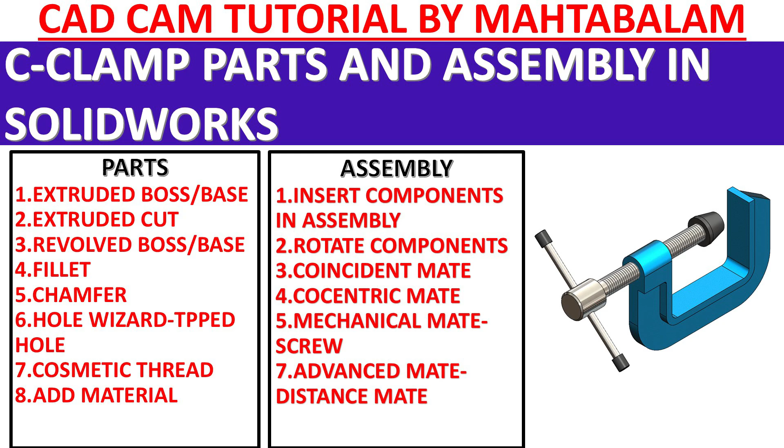In this tutorial, we will create each and every part separately and assemble at the end, and we will set some important relations also. So I hope you like it.

So let's do a simple exercise in SolidWorks. Let's make a new exercise in SolidWorks. This is C clamp assembly in SolidWorks. We will create each and every part and assemble. Note, all dimensions are in millimeter.

ANSI metric standard for thread. There are 5 number of parts. Material written cast iron, plain carbon, rubber, plain carbon. The quantity also mentioned here.

Now which one is part number 1? You will see this is the assembly. This is part 1, the clamp. Scale already written 1 is to 1.2 for reference.

Okay, now let's check this one. Now we will see this one. You will see side view. The depth is 20 millimeter.

Then there are two portions: one, this center one, 8 millimeter; the outer one, this one, 20 millimeter. Just note down this thickness, 5 millimeter, 5 millimeter, center to center distance 60 millimeter, 70 millimeter this one, 30, 68. Okay, then this inside radius seems 5 millimeter.

Fine, and you will see this all. So let's try this first. Now I am going to select the right plane, sketch. Now activate here line tool.

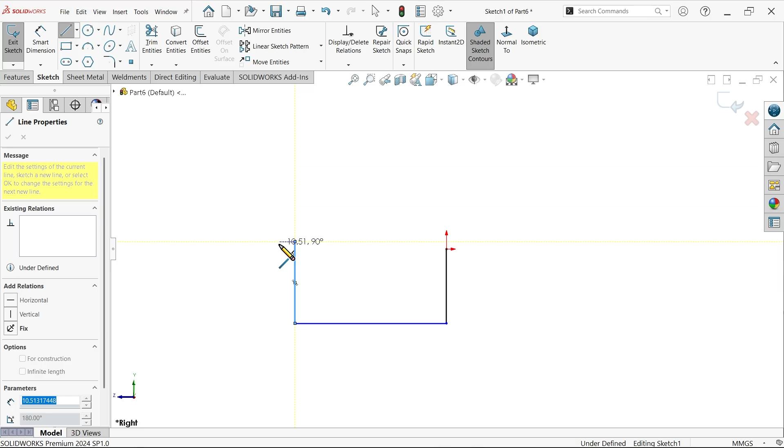Now let's make a few important relations. These two points, keep like this.

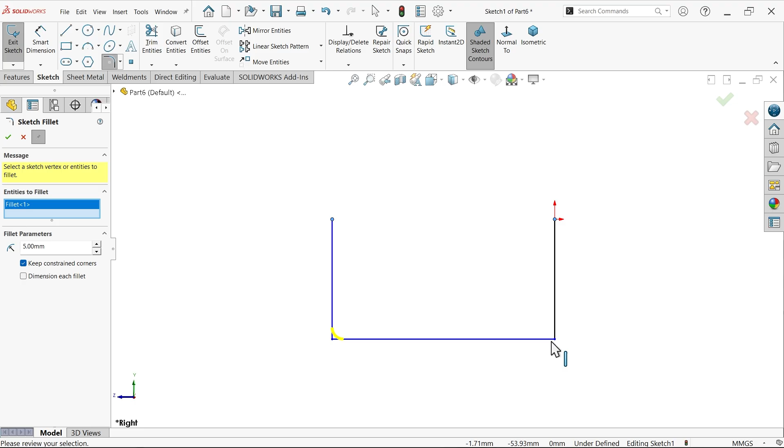Activate here sketch fillet, keep 5 millimeter, and select both the corners because this corner is given 5 millimeter.

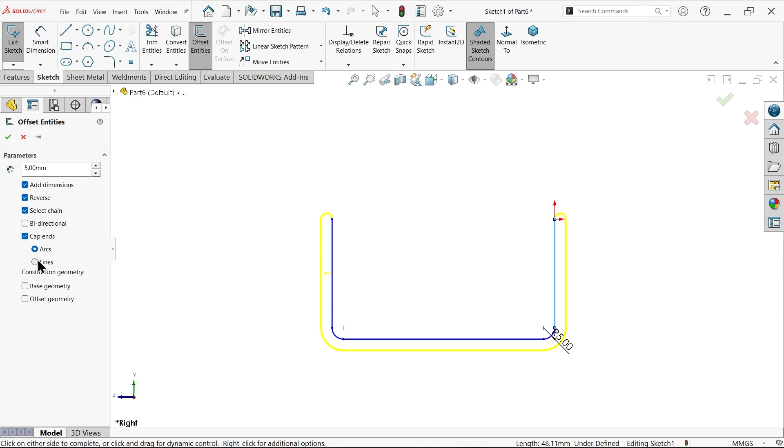Let's activate offset, keep 5 millimeter, add dimensions, select chain. Now let's select chain. Now make it reverse. Or even though you can select end cap line. That's it. Now you will see we have a closed profile.

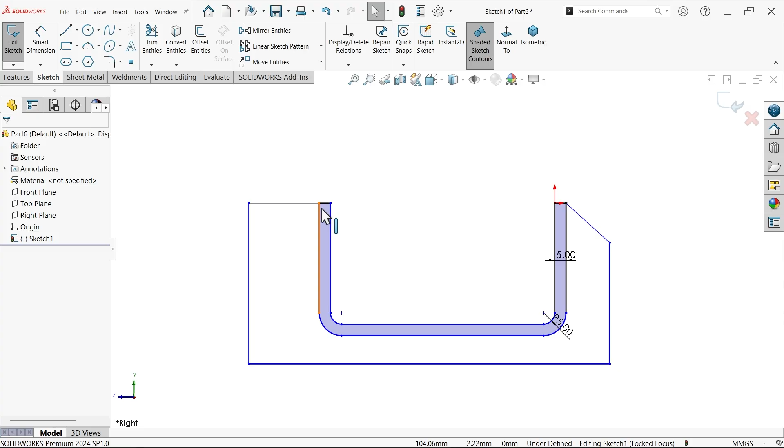Now again let's activate line tool. Now this is our second profile and this is also going to be closed. So let's apply dimensions.

120. Now center to center, 70 millimeter. Now distance from here to this part, 3, and from here to bottom, 68 millimeter. Okay, fine.

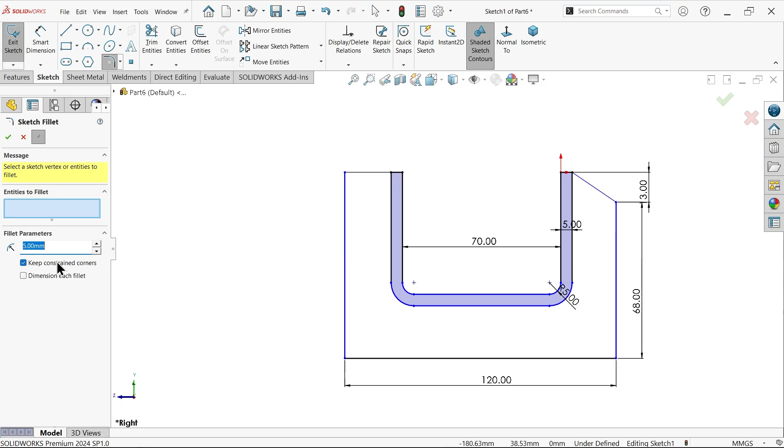Let's apply here sketch fillet and this is going to be 30 millimeter, these two corners. Fine, close. Okay.

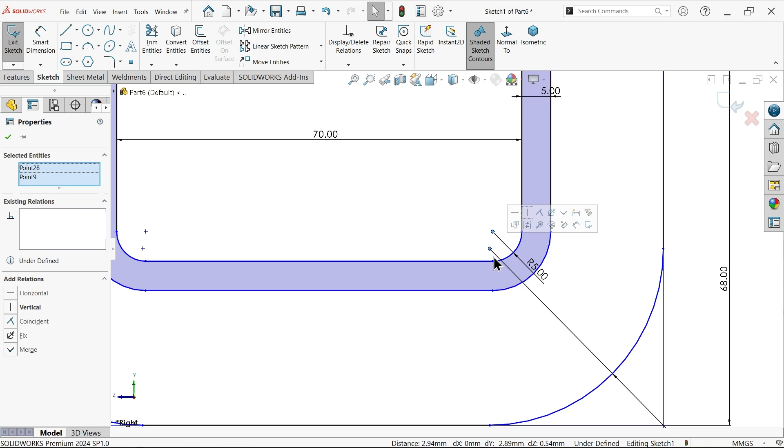Okay, do one thing, look: according to drawing, these points are same in one. So make it coincide. Look, the drawing seems fully defined.

Now simply select extruded boss base. Select this part first, keep mid plane, and let's make this one depth only 8 millimeter.

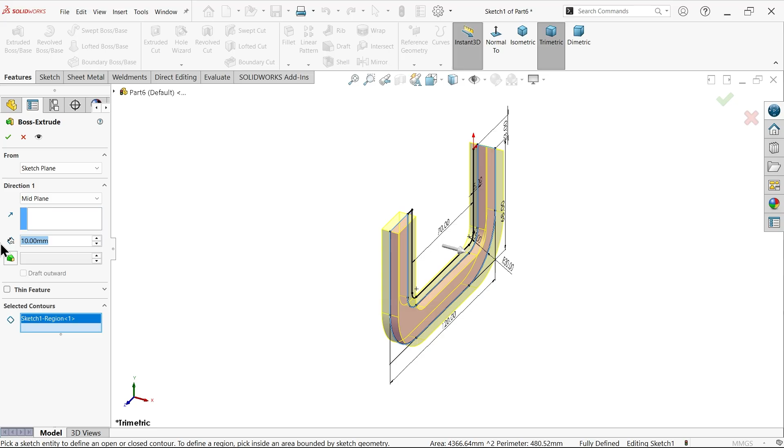Okay, now again select the sketch, extruded boss base. This time in selected contour choose this face and make it 20, mid plane. Say okay.

Now at this part you will see R10 and 23. This is a kind of a hole, M12 into 1.5. This corner fillet here given 2 millimeter. Now this distance 23.

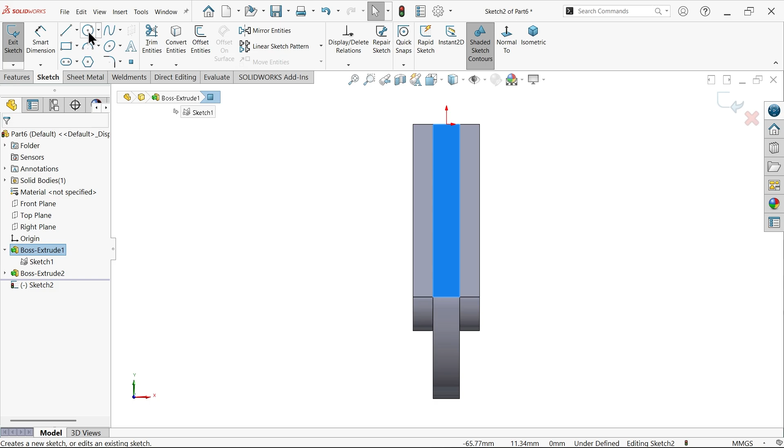Okay, let's do this. Select this face, sketch. Now activate here. Let's make a circle up to this point. Activate line. Okay, let's do one important relation.

Select these two lines, outer line and circle tangent. Similarly, do one thing, tangent. It seems fully defined.

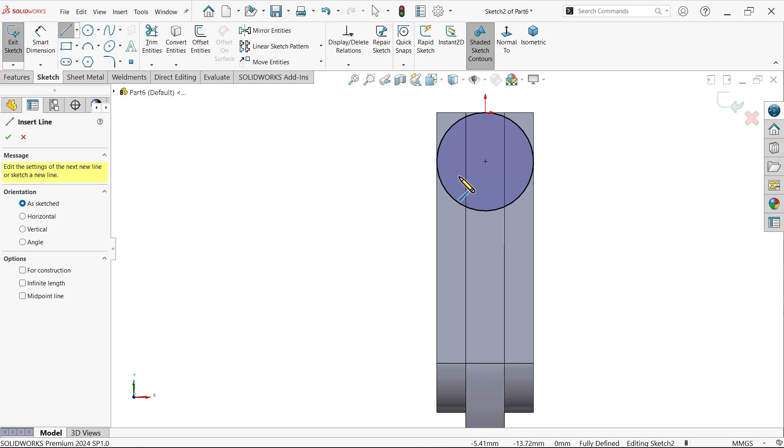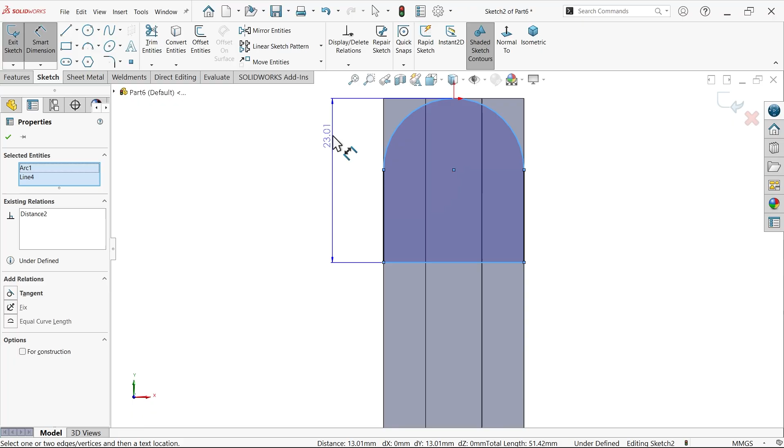Exit. Now let me select trim entities, power trim, and delete this internal one. Smart dimension. Now select this line, press or hold shift key, select this top edge and make distance 23. Extrude, and this I am going to, let's say, up to surface and select this surface. Fine.

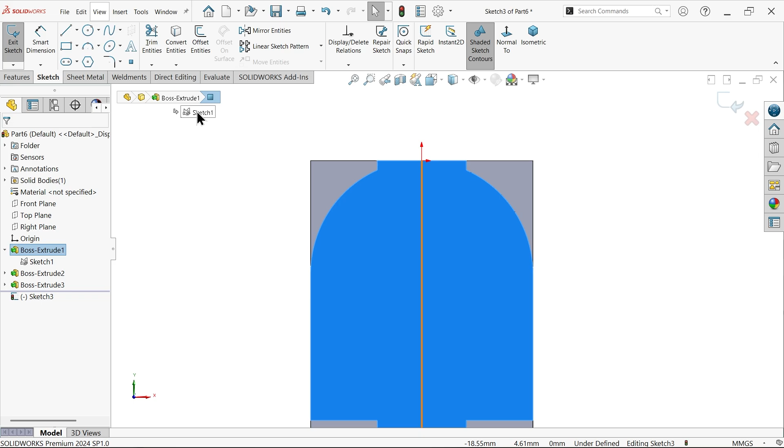Again I am going to select this face, sketch. Now I want to cut this upper face, so let's activate line tool first. Now start with this point. You will see this is the tangent point.

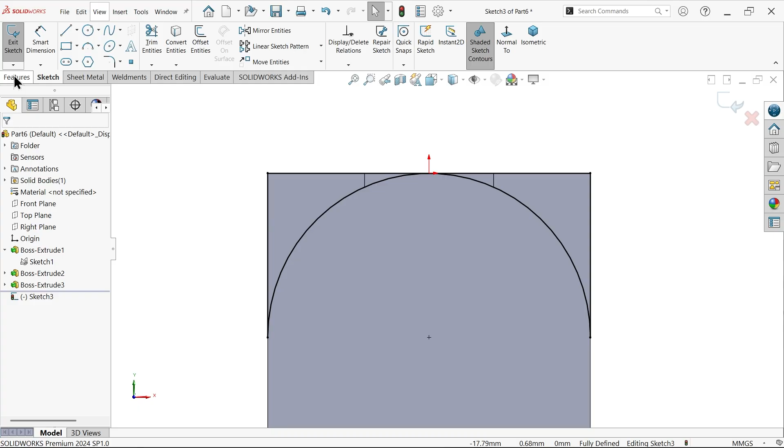Okay, 3-point arc. Make sure this line connects with this. Extruded cut. Now select this portion, this portion. Okay, now here choose up to surface and select this surface. So this is going to cut only up to this surface.

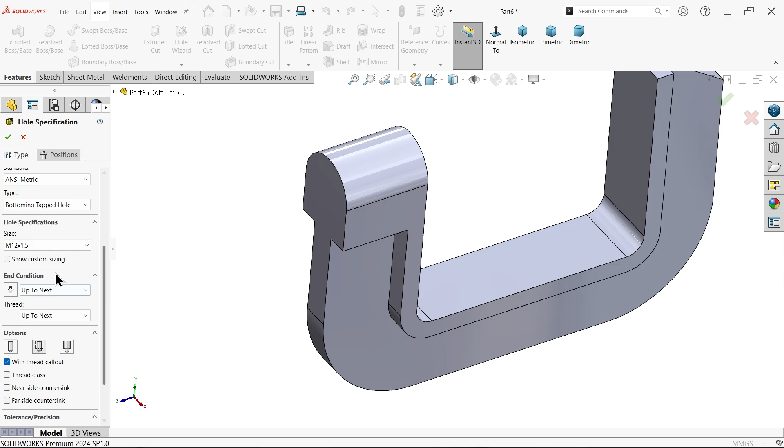Say okay, look here. Now let's make a hole here. Hole wizard: go to, let's say, straight tap, ANSI metric, bottoming hole, M12 into 1.5, up to next.

Thread with callout, check position, and first we have to select this face. Now just keep cursor over edge and you will see center point. Place, right click, choose, select. Okay, now go to option, document properties, detailing, and here check shaded cosmetic thread.

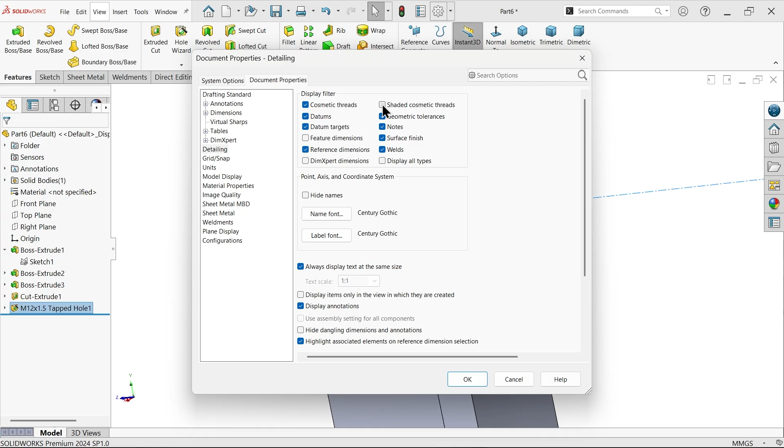See, radius 2 mm. These are the geometrical dimensions, we don't need for this. Now let me activate fillet.

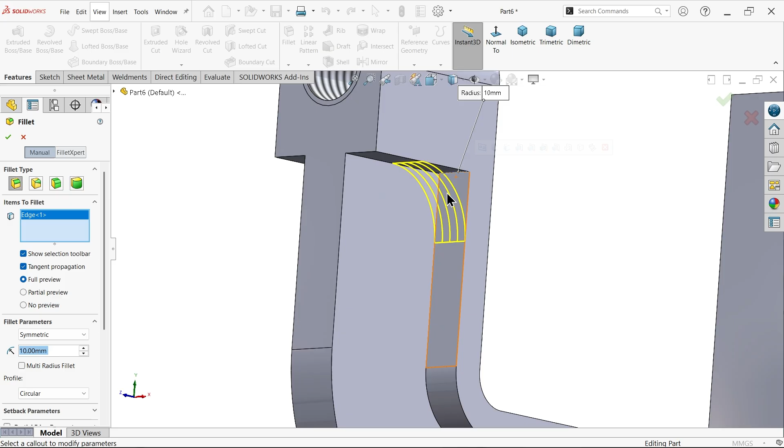Select this edge and here make 2 mm, and fillet type constant size fillet, tangent propagation, and profile circular. Okay, see.

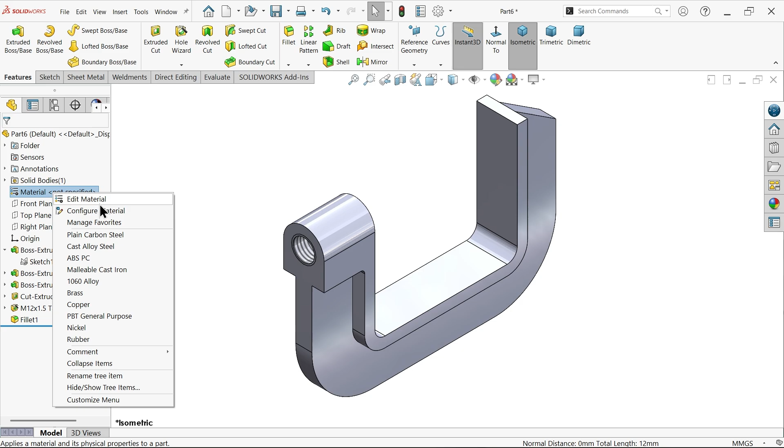Now let me add some material. Go to edit material. This is iron, gray cast iron. Apply, close. I am going to little edit the color.

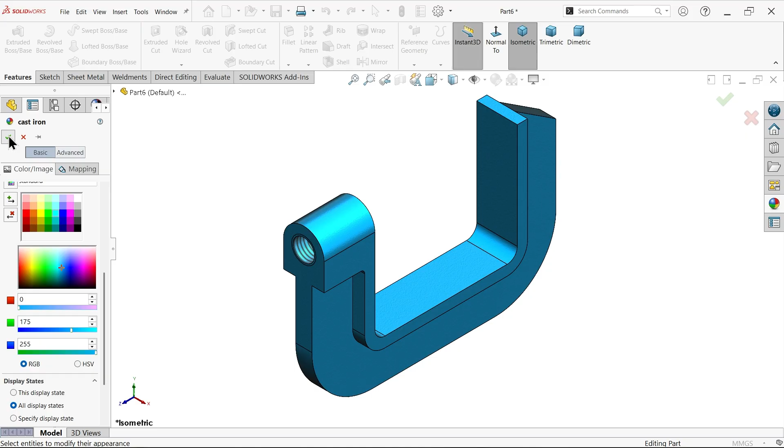175. Fine, now select this internal face and change this finish. Let's say polished steel.

Now let me save this one. Desktop, create a folder. C clamp assembly.

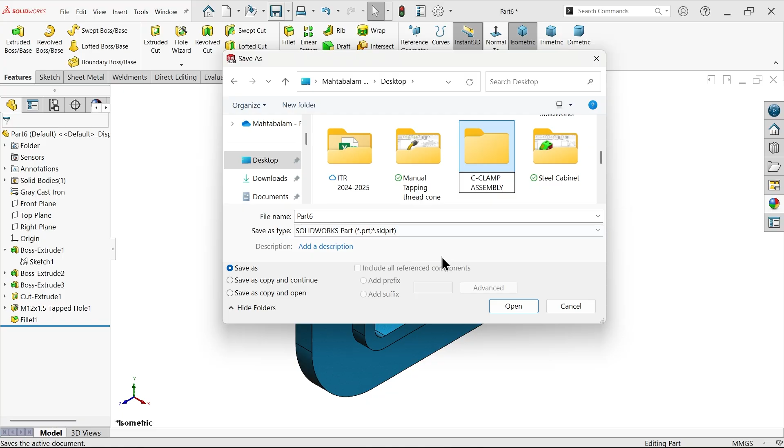Make this one part 1, clamp. Now let's go and choose new part 2.

Now part 2 is the screw. See this outer diameter 20, length 22, then from here to here 96, then this diameter you will see M12 into 1.5. Okay, then this one 6 diameter, 12. So first make this one, then there is a hole also.

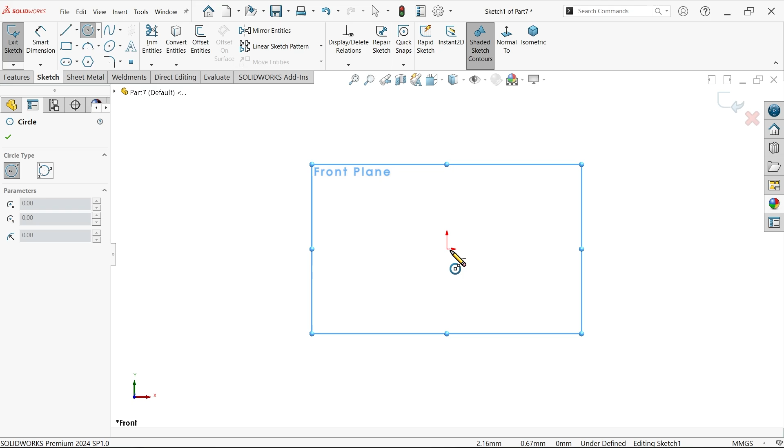Let's do this first. Front plane sketch. Now activate circle. Start with origin point and define dimension 20 mm. Go to feature and activate extruded boss base feature. Here choose end condition blind, 22 millimeter. Make it reverse. This is our front face. Say OK.

Now let's apply material for this, so we will use plain carbon steel. Apply, close.

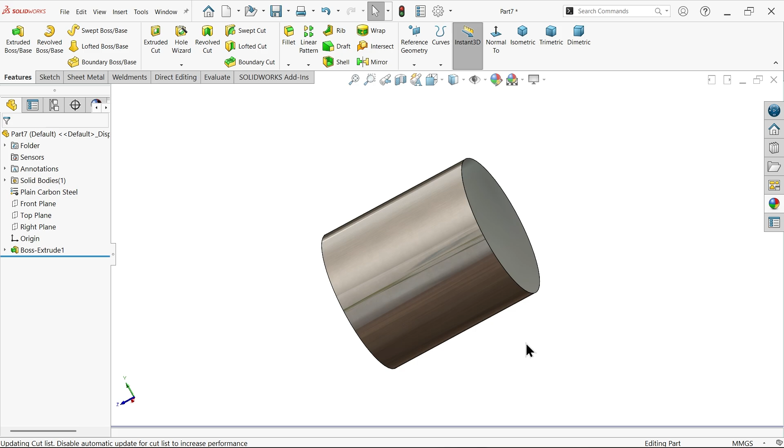Now select the back face, sketch. For M20 thread we are going to create M12, not M20, 12 diameter, and extrude this. Select extruded boss base feature, and we need to extrude up to 96 millimeter. So here keep end condition blind because this is moving in the perfect direction.

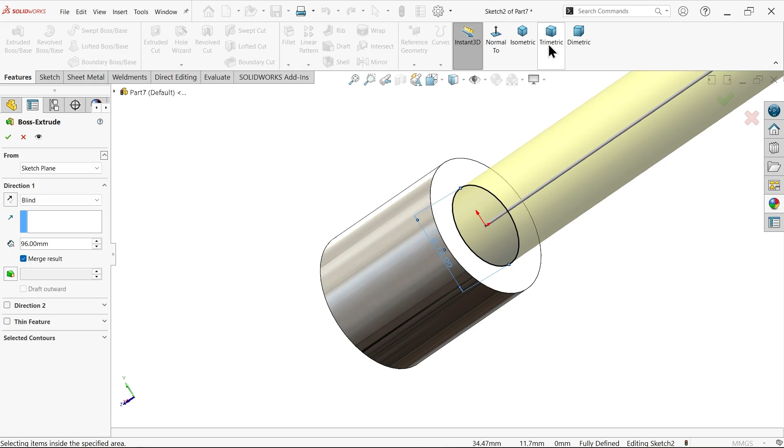Okay, select this face, sketch. Now here one more, diameter 6. Extruded boss base. Now this length going to be, let's say 12 millimeter.

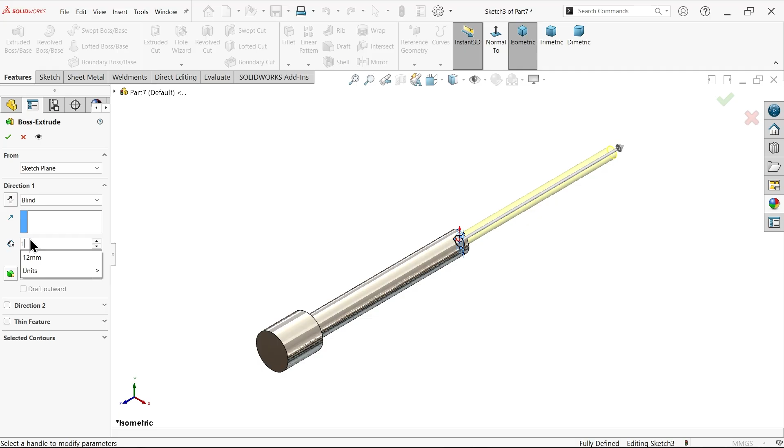Say OK. Let's apply cosmetic thread since we already did cosmetic thread before. So I'm going to insert, drop down, annotation, cosmetic thread. Now here I'm going to select this edge, metric, machine thread, M12 into 1.5. Here keep blind, and the length of thread 90 millimeter. Show.

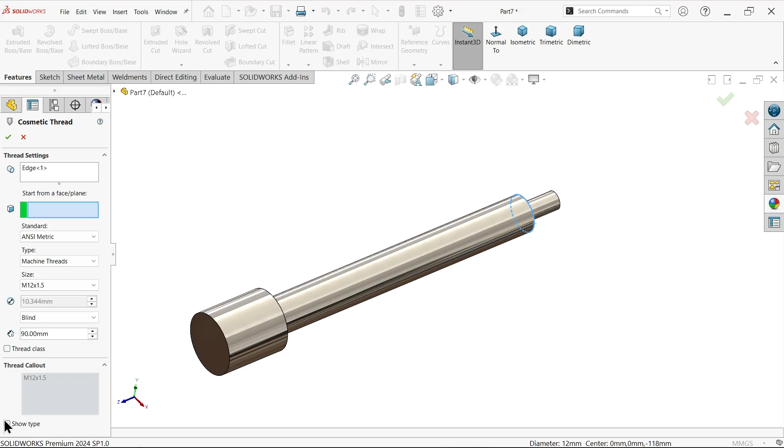Now start face, select this face. Okay, go to options, document properties, detailing, and here check shaded cosmetic thread. Okay, now look.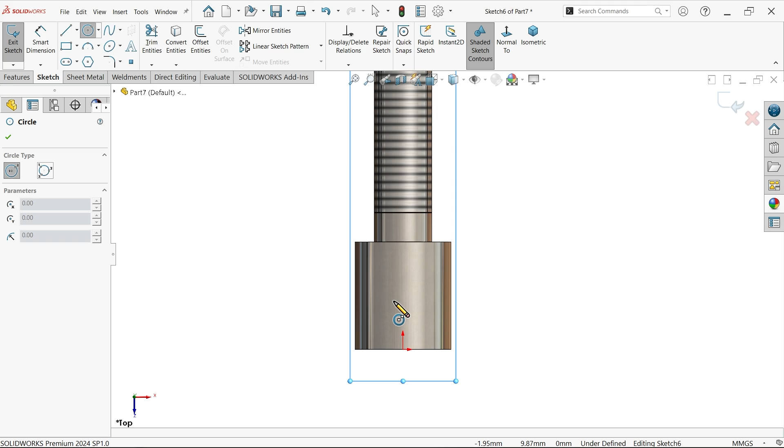Top plane, sketch, circle, smart dimension. Now this is going to be 12 millimeter. 5.5 is still not defined, meaning we need to define a constraint. So select center point and origin point and make constraint vertical.

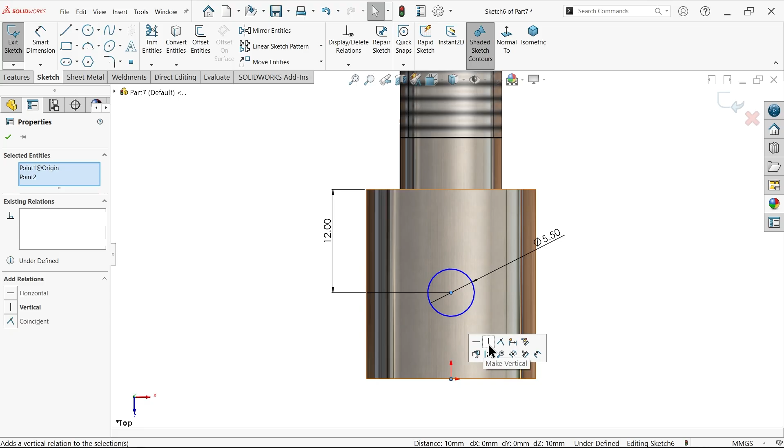Extruded cut and make a hole here. So here I am going to select through all in both directions. So see, this is going to cut through all in both directions.

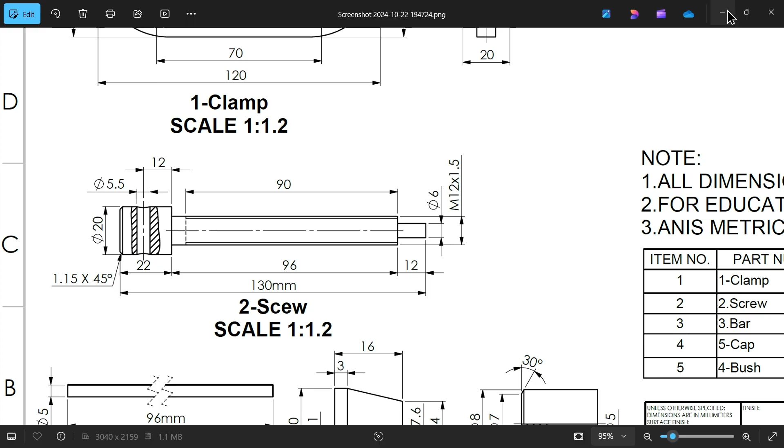Now chamfer 1.15, 45 degree. That's it, total length 130, we will measure it later. Chamfer, angle distance 1.15, and this is going to be 45 degree. And select this face. Say OK.

Here we are done. Save. This is part number 2, screw.

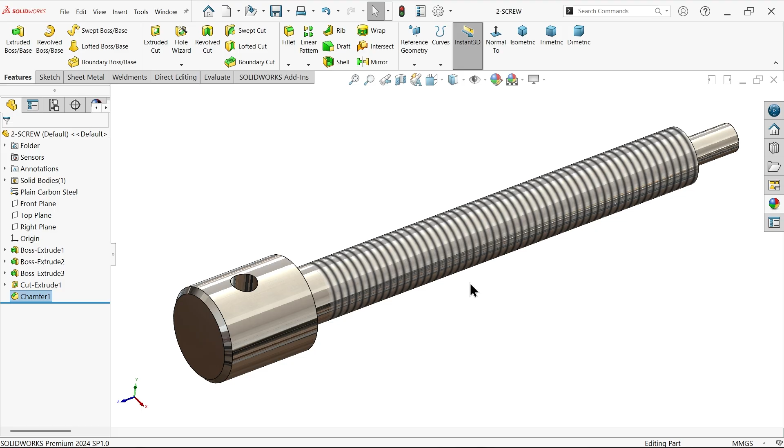Let's go save a new part. Part 3 is just a bar, 96 by 5 millimeter.

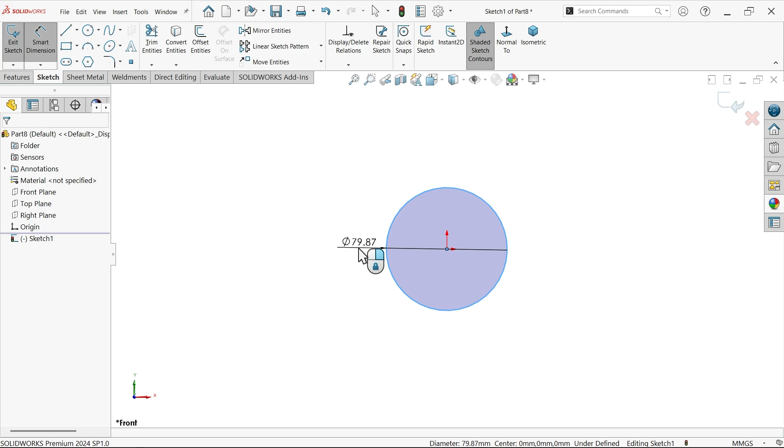Front plane, sketch, activate circle and draw a circle with origin point. Smart dimension, define diameter 5, say yes. And go to feature and activate extruded boss base. Now here end condition I am going to keep mid plane so that material moves to both sides equally.

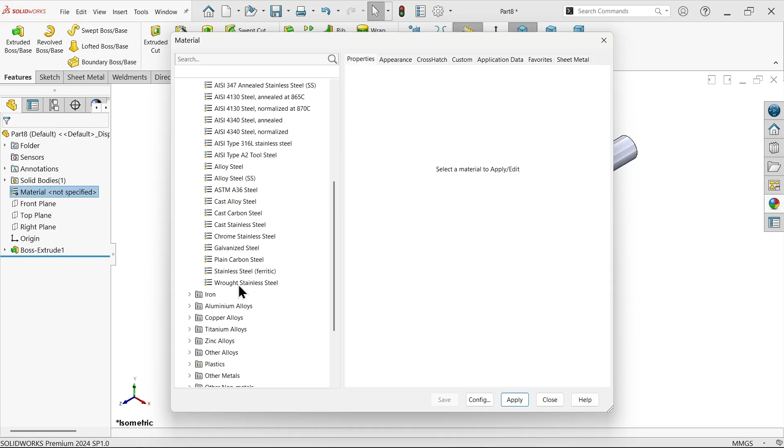See, 96 millimeter. Material, close. Plain carbon steel, close. Now let's say this is going to be the bar.

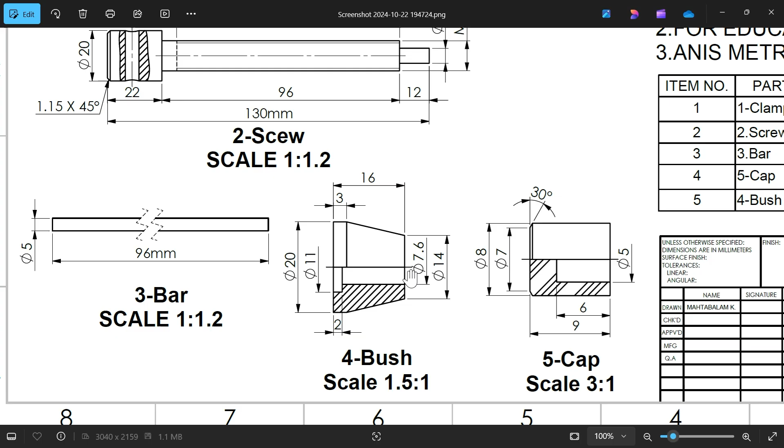New part. Now part number 4 is bush. This is half section view. See, this outer diameter 14, 20, and you will see this is the section view shown 7.6, and this is going to be 11, and depth you will see 3, 16, and this cut depth 2 millimeter.

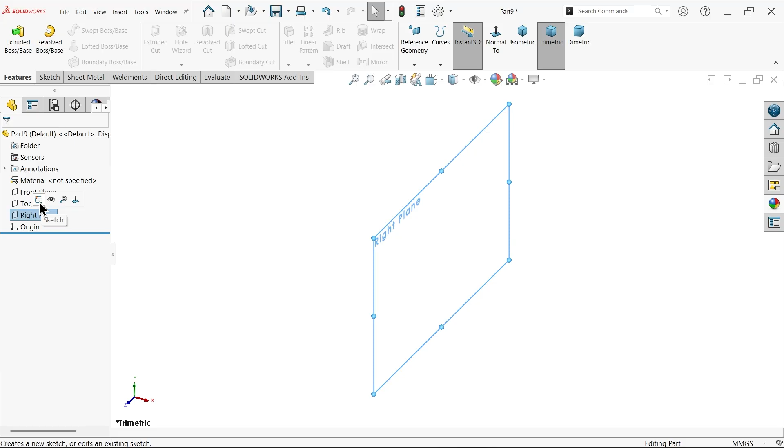Okay, let's say right plane, sketch. I am going to draw center line. Okay, now activate line tool. Exit. Now this is a closed sketch.

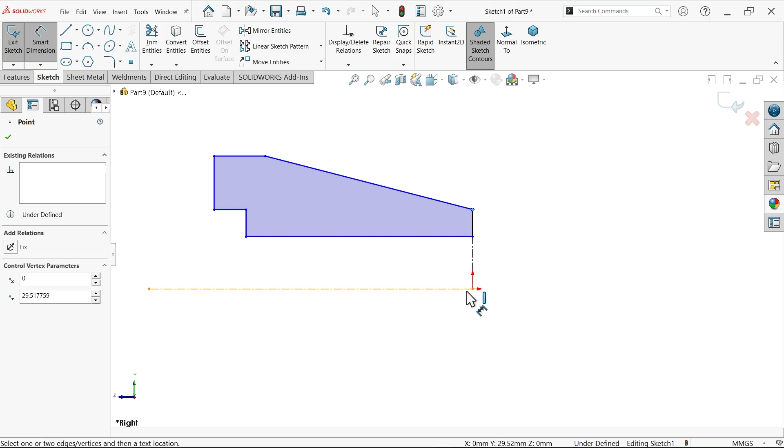Now let's define, select this point and this one. Keep cursor outside, you will see diameter, and this is going to be 14. Similarly choose this one, 20. This one, 11. And the inner one, 7.6 millimeter.

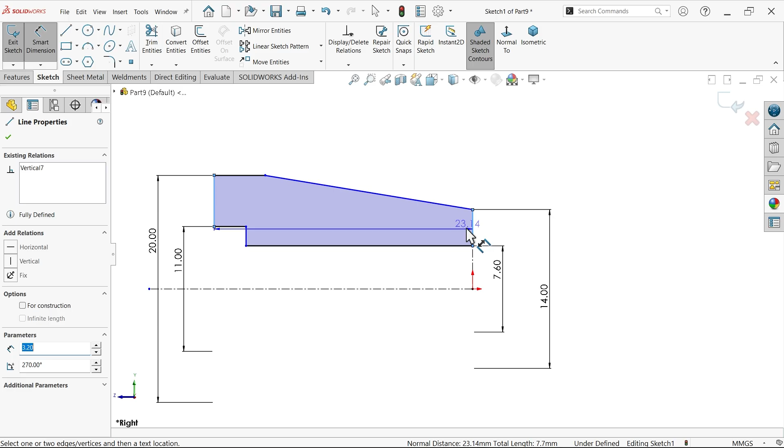That's fine. Now select this one, 16. Okay, let me drag this inside. Three millimeter, and this is going to be 2 millimeter. Look, it seems fully defined sketch.

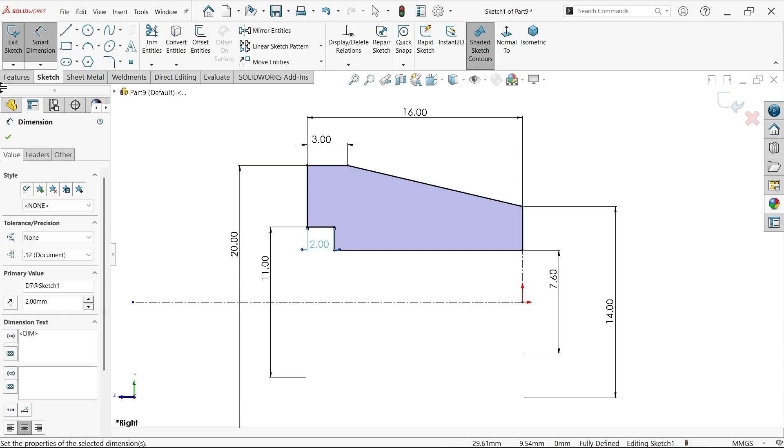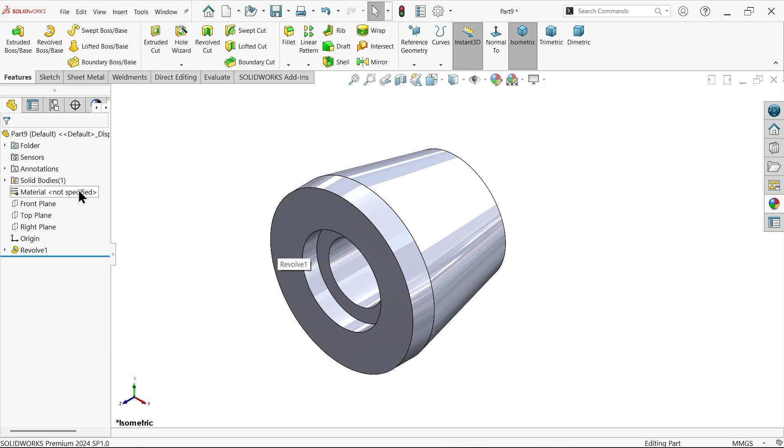Revolve boss base feature. Now here we need to choose center axis or axis of revolution. So I'm going to select this construction line. You will see the preview. Keep end condition blind, angle 360 degree, because I want a complete body. Say okay. Look here, material seems cast iron, so let's go edit material.

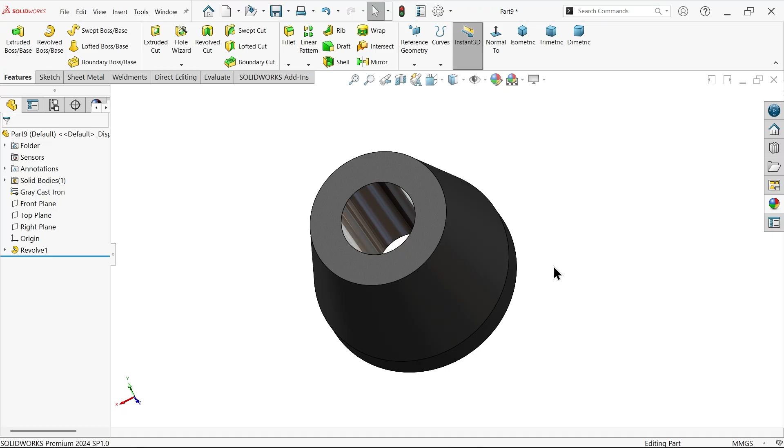Close. Now for this internal finish I am going to keep finish like polished steel so that it looks better. Say this is part number 4, and this is going to be bush.

Let's go to new file, new part. Now let's make the last part number 5, cap. You will see 9 millimeter. We will use here the same circular revolve boss base feature, 9 by 6.

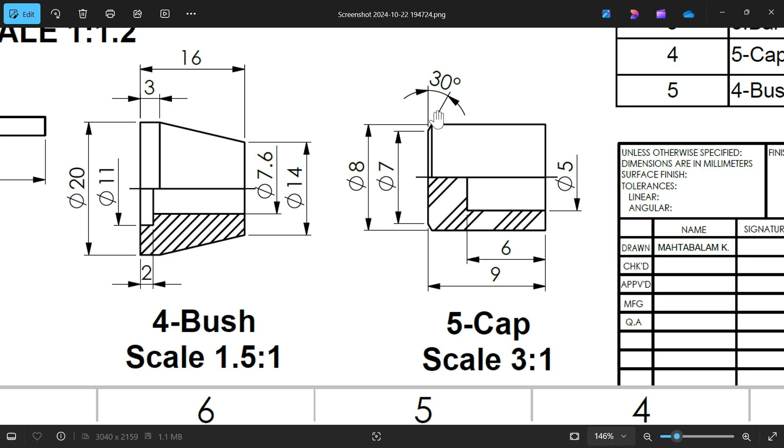This diameter you will see 5, total 8 diameter. Now there is a chamfer, 30 degree. Let's see this one. Right plane, sketch, activate line tool.

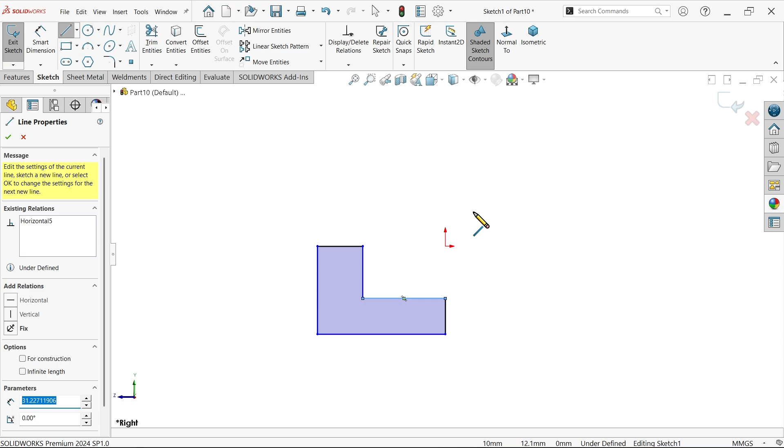Okay, let me connect with this. Make this line construction geometry.

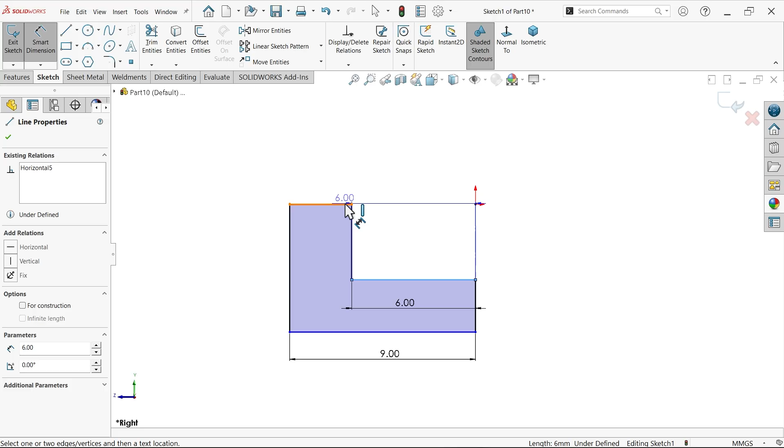9 millimeter. This is going to be 6 millimeter. Now select this one with this. The diameter shows 5, so this one make 2.5. Enter. Select this one. 8 divided by 2, it's 4. That's fine.

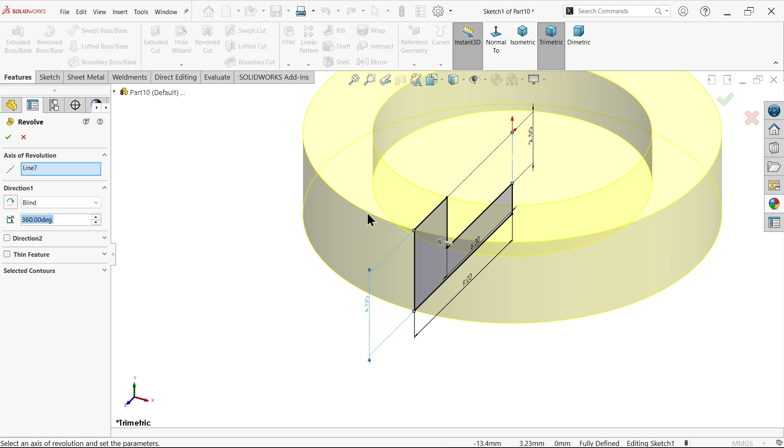Revolve a boss base. Now here delete this and select this axis. End condition blind, 360 degree. Say okay. Now look.

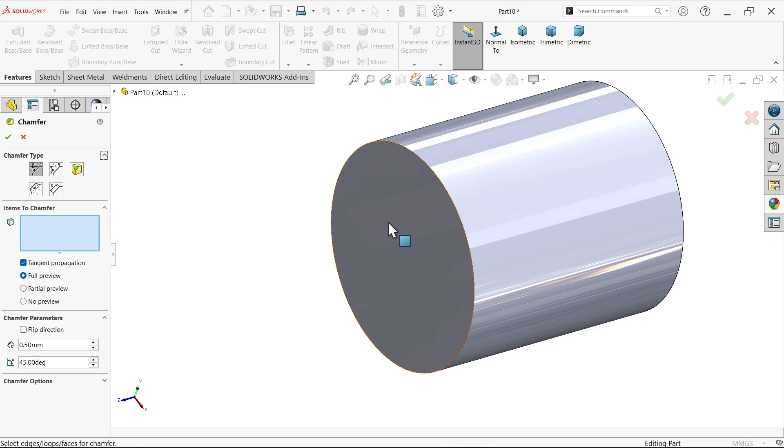This is going to be a rubber, so chamfer. Seven diameter shows means 0.5 in both side. Angle 45. Let's check.

Now let me show this view. Now this is not flip direction. Let's see. Look, you will see at bottom diameter 7.

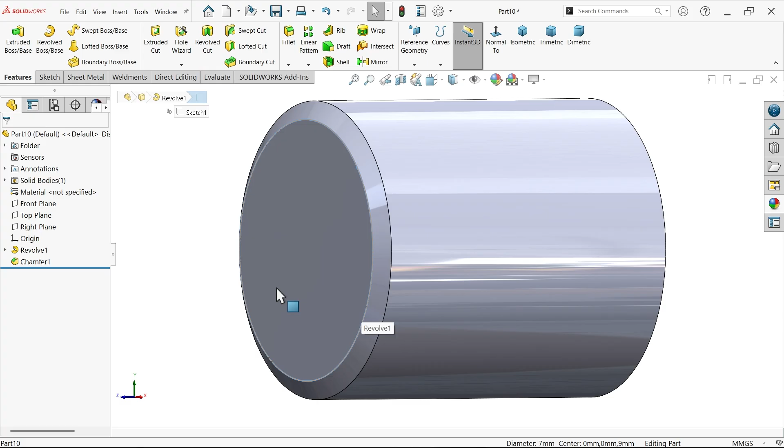Now for material we have to go natural rubber, apply, close. Okay, let's change the color for this inside, so it looks better.

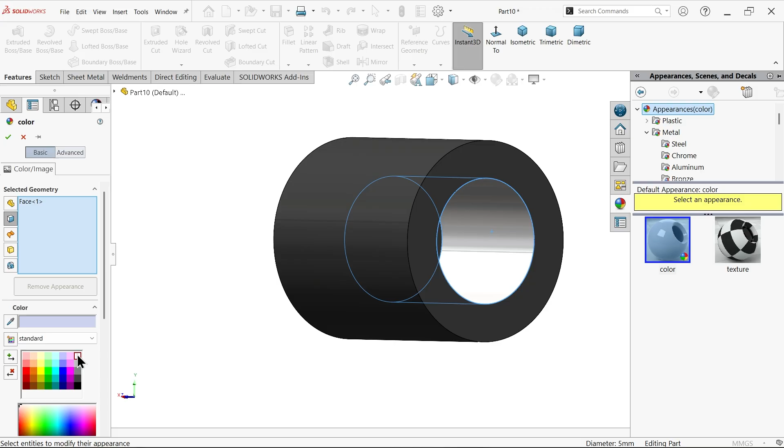Okay. Now let's make part number 5 rubber.

Now let's start from here, go to file, new, and here I am going to choose assembly. Even you can select advanced and from there choose assembly.

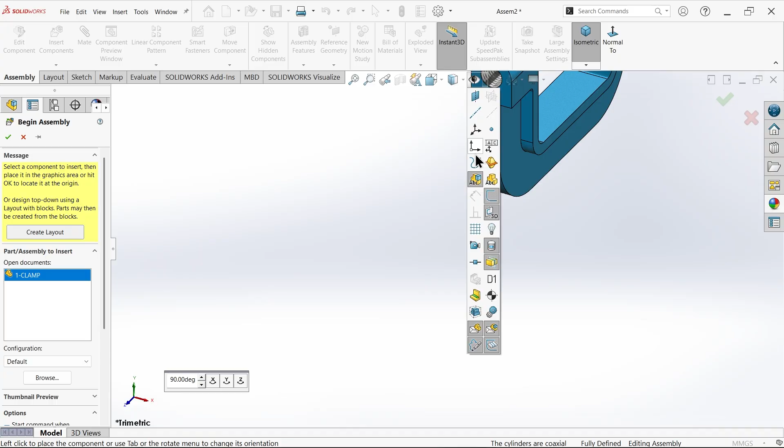Okay, now let's say first part clamp, open. Now before going to place, I am going to open origin point, because if I keep my cursor over origin point, see this is going to fix. Look, click, and this is fixed with origin point.

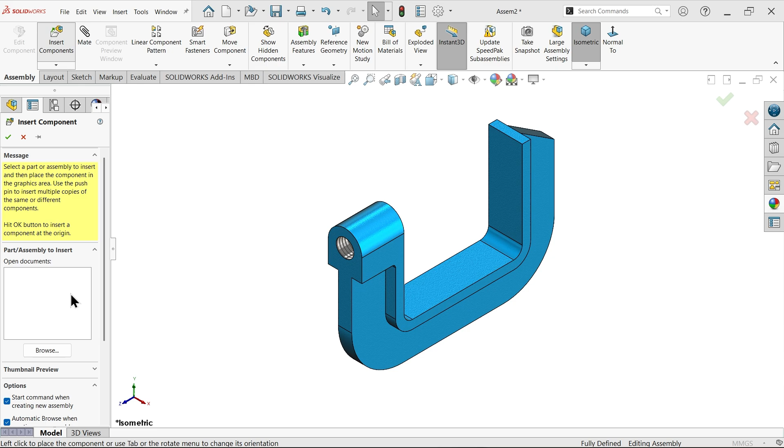Now let me hit isometric view. Okay, it looks good. Insert. Now screw part number 2, you can, let's say, make a small icon, medium icon, medium also not properly visible. Okay.

Now I don't need to rotate, so simply keep here. Now I am going to go mate, and here I am going to go mechanical mate, screw.

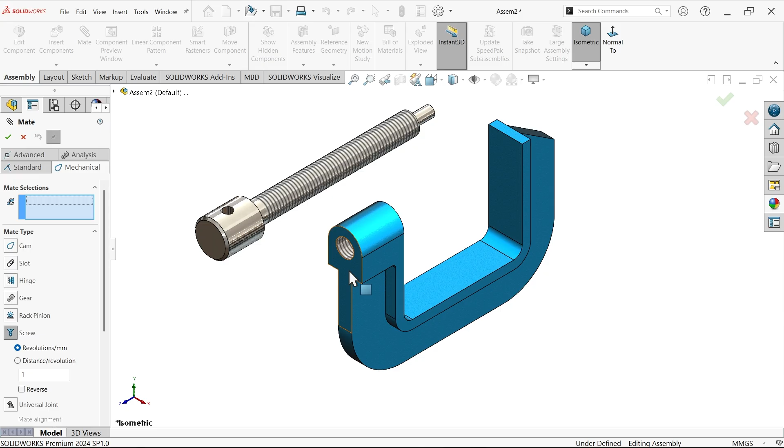Now I select this face and this one, and here I am going to choose distance per revolution. Pitch is given 1.5, so I am going to choose 1.5 distance travel per revolution. Say OK. Now look. Okay, let's do one thing.

Let's fix bar here, then we will realize how this is going to happen. Bar and cap.

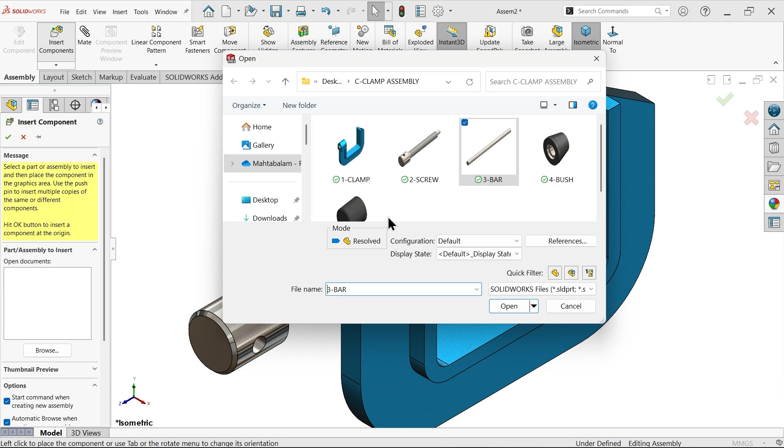Open. Now bar, I want to rotate. So here let's rotate Y. Click one time. Okay. Now this is also I am going to rotate Y. Okay, select place here. Now choose mate.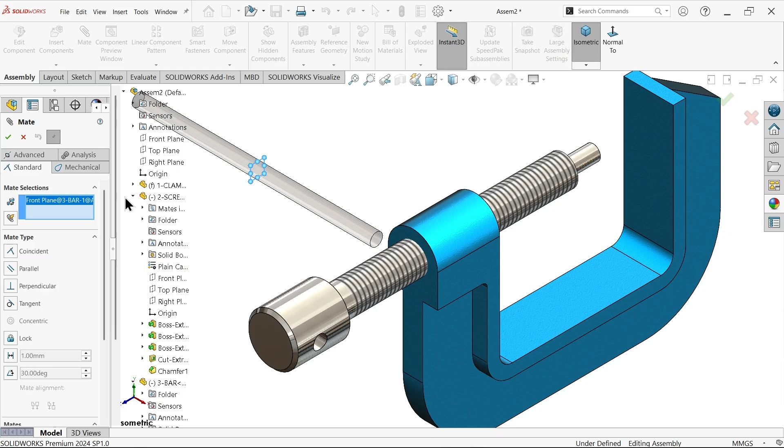Now first bar. Bar mid you have to find out. Front plane is the mid plane of bar. Then go to screw. Screw, let's say keep cursor. Top plane.

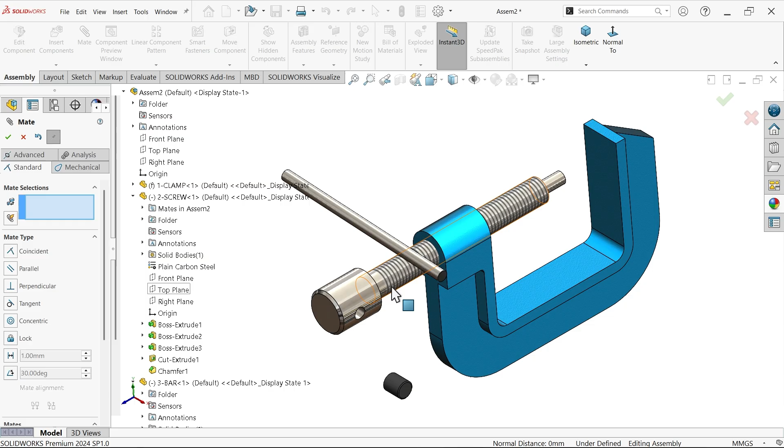See? Okay. Now select this one and this hole. And this is going to exactly fit at center. Fine.

Now I am going to select this internal face and this face. And there is a concentric relation created. Say OK. Now I want to rotate.

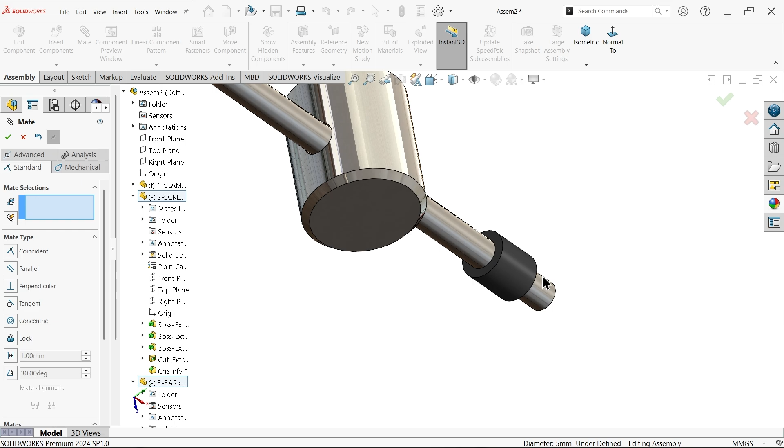Look, this is rotating. So what we have to do, we have to fix this. Right click, fix. Otherwise difficult to maintain. Okay, this is going to fix this side. Mate.

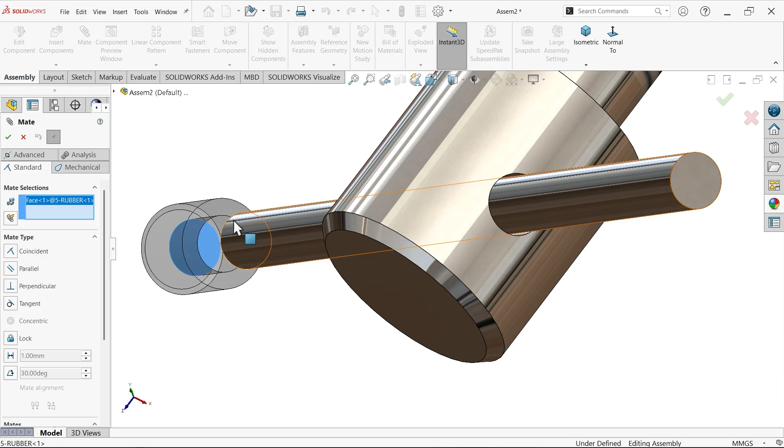Now select internal face of rubber and this face, coincide. Now press Ctrl key and click and drag and create one more part. That's fine.

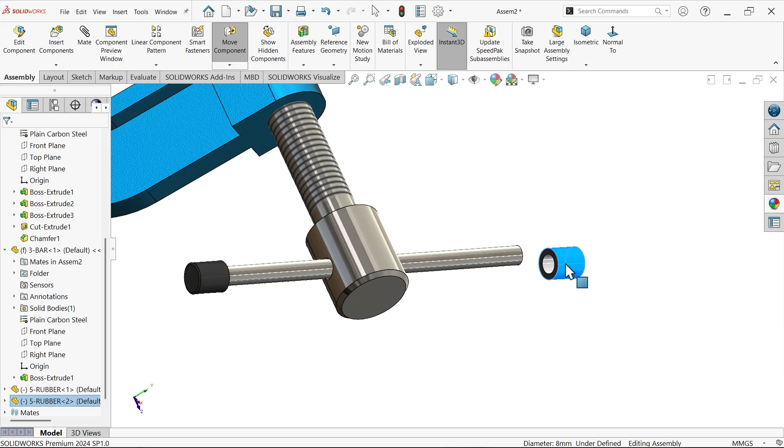Rotate. It seems like this. Okay, let's rotate. Click, bring here. Mate.

Outer face, internal face, concentric relation, fine. Internal face and this face. Okay. Cancel. Okay. Now, this is fixed, right?

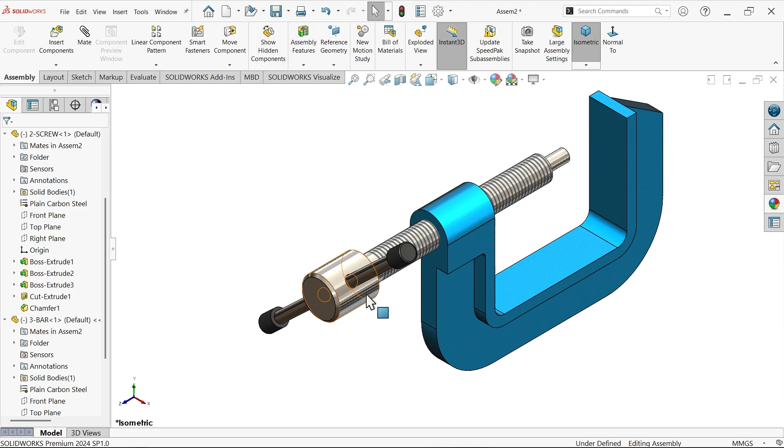Right click. No, not this one. I think this, okay, rod is fixed. Float. Now let's see, this is rotating slowly, see. But if your, see, rod.

Let's bring the last part, bush, open. Okay, this is going to fix something like this.

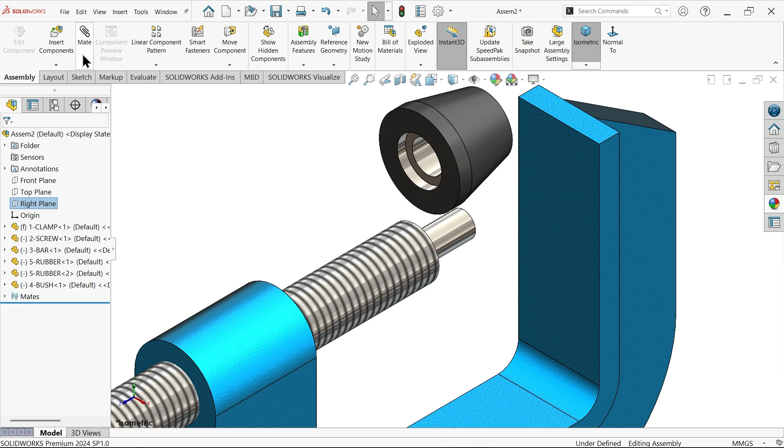Mate. Now here keep standard, and I am going to select this internal hole and this hole going to coincide. Okay, now these holes going to fix with this, so select this internal face and this face. Okay.

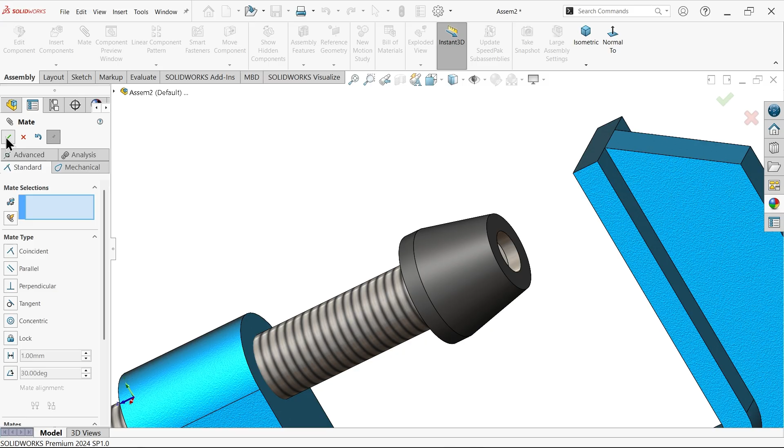Now let's do an important relation, distance mate. Go to advanced, and here we have option distance, minimum and maximum. Minimum, let's say 1. Maximum, we have to calculate the center to center distance 70, and this is 16. So if you subtract 70 minus 16 is something like 54, and 1 millimeter already there, so let's say 54.

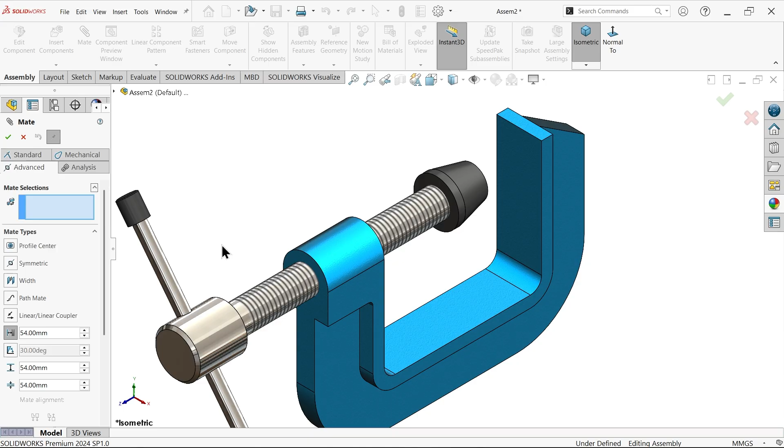Select this face and this face. Now here let me choose minimum 1, maximum 54. Let's say okay.

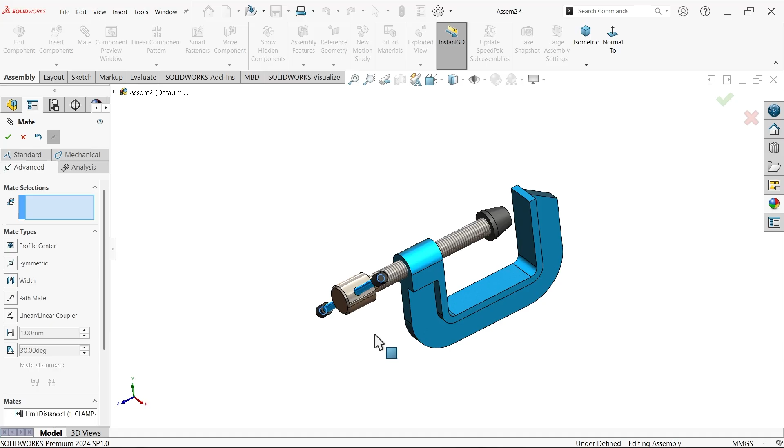Now this is set at maximum. See, now see. Cancel. Now if you rotate outside this, see, I'm stuck here, I'm not able to move beyond this face. And let's move other side. See, I'm not able to move further here.

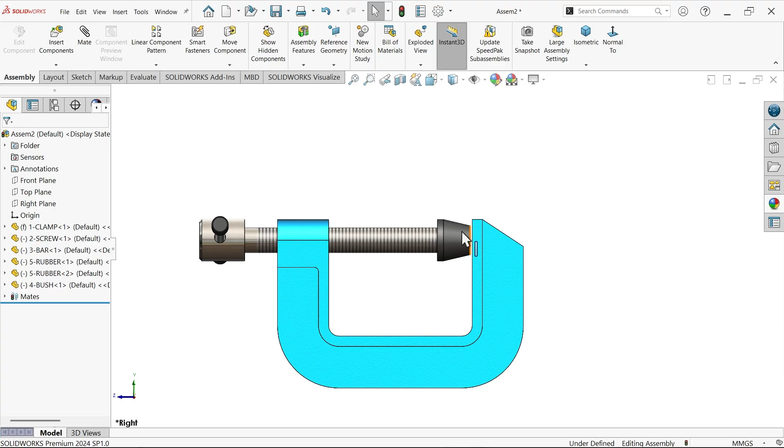See, 1 millimeter gap we set here. If I'm going to move this one, see, I'm not able to move here, 0. So this is how we set. Just select rod and move.